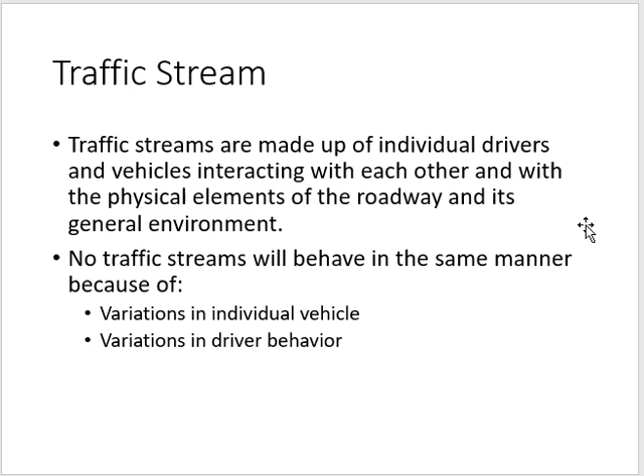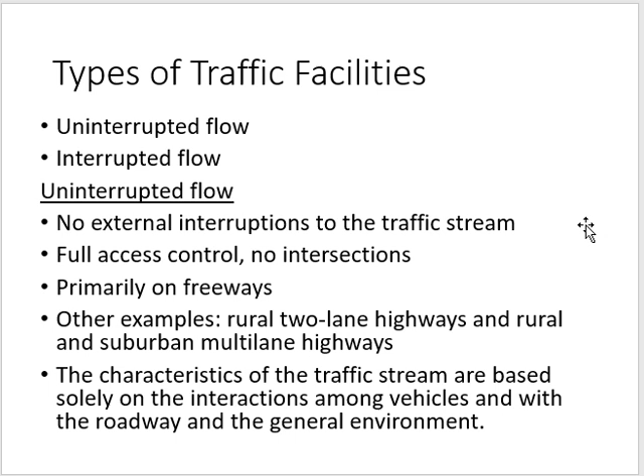Okay, based upon traffic flow, the types of highways based upon traffic flow, there were two: interrupted and uninterrupted. Then we talked about traffic data. Traffic data can also be divided into two types, right? Two types of traffic data, traffic parameters: microscopic and macroscopic. Microscopic is small, one or two vehicles. Macroscopic is a group of vehicles.

Within each category, we will discuss three. Within each category, we will discuss three. We started with macro. Okay. Yeah, not asking.

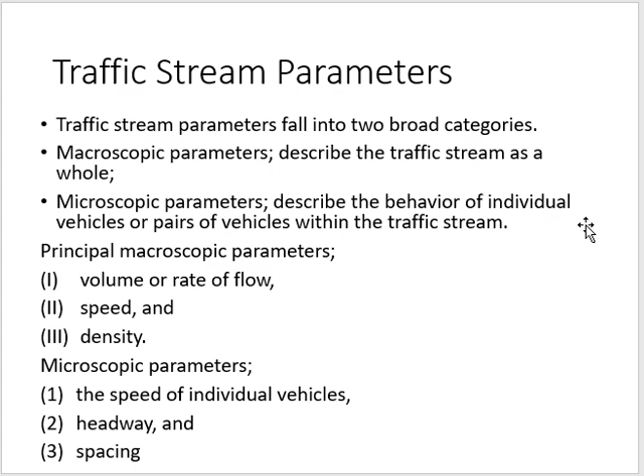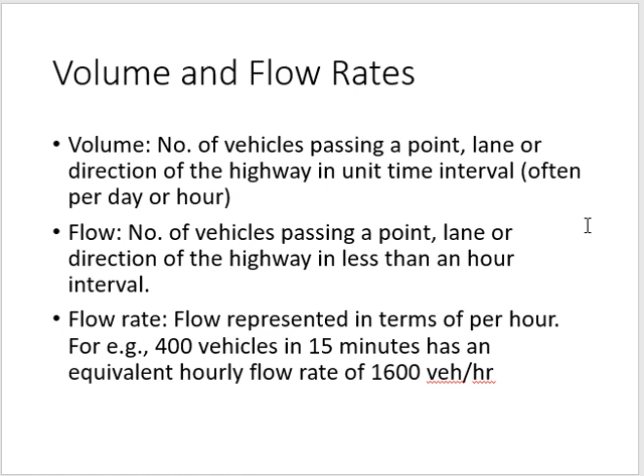We started with volume. And volume can also be called flow or rate of flow. How do we define volume? Number of vehicles per day or per hour. Can it be less than 1 hour? Yes, and then we call it flow. If you take the flow and convert it to 1 hour, it's rate of flow or flow rate. Then we discussed 4 types of daily volumes.

Okay, we discussed 4 types of daily volumes. These were AADT, AAWT, ADT, and AWT. AADT means average of the whole year, all days. AAWT means average of the whole year, only weekdays.

Only weekdays. ADT means average of all days, but which A is missing? Less than 1 year. So the A of annual is missing here, right? It was AADT. I took the annual out. It becomes ADT. And the last one is AWT: average of weekdays and less than 1 year.

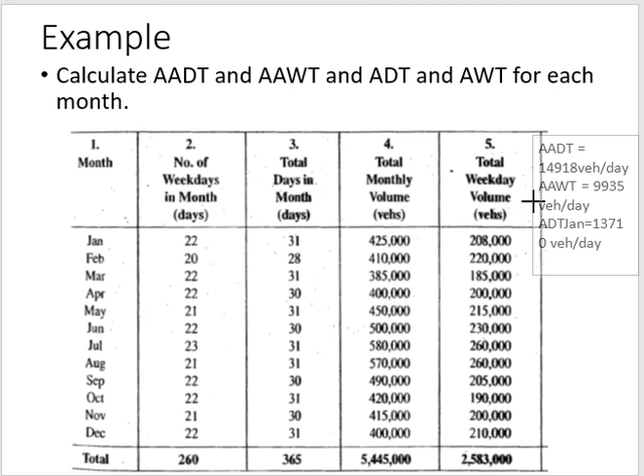Okay. Now, going back to AADT. It's for the whole year, right? And then you calculate AAWT as well. So AADT is higher, AAWT is lower. What does it tell you about this place or about this highway? When you take the overall AADT, it is higher. When you only take weekdays, it becomes lower. That means what? The weekend traffic is higher. On this location, the weekend traffic is higher. So maybe it's a location where people go on weekend. You know about these places. Don't tell me.

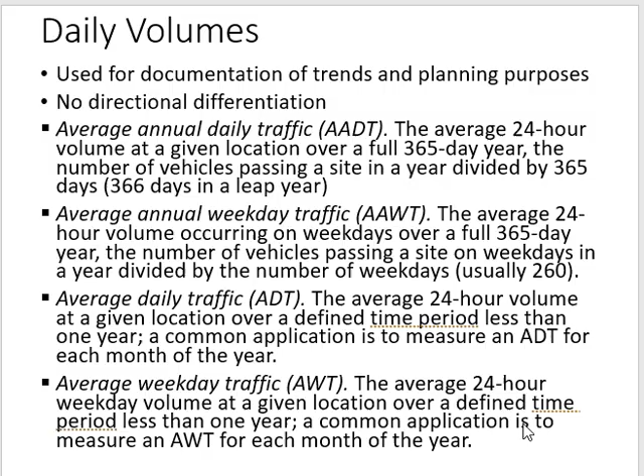Now, yeah, okay. So selection of daily volume depends upon the data which is given to you. In the first example which we did, where we calculated ADT and AADT and AWT and everything, the data was given for the whole year, right? So I can calculate all these four things, ADT, AWT, AADT, AAWT, because the data is enough. If somebody gave me data of 1 month and told me calculate AADT, you cannot, right?

Somebody gave me the total of the whole year only. We used 5445, whatever the total was. Somebody just gave me this value. Now he says calculate ADT of January. I cannot. Okay? Clear or not? No? Huh?

If total traffic of the whole year is given, nothing else, you can divide by 365 and get AADT, right? Can you use the same value to calculate ADT of January? No, because for that you need total traffic of January. So what you are calculating, first of all, depends upon what data is given. Clear?

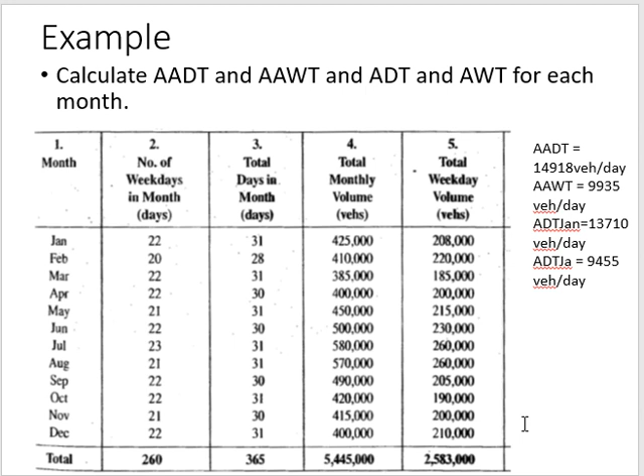So ADT and AWT cannot be for the whole year. And similarly, AADT and AAWT cannot be for less than 1 year. You cannot interchange them. I have to calculate AADT, but the data is 1 month, I will call it AADT? No. You cannot do it. They are asking for ADT, but I have the total of the whole year, I will call it ADT? No. You can call it something else, but not ADT. Okay?

I use daily volume for planning. Then I convert daily volume to hourly volume for design. And even for management of traffic, like changing signal timing, putting a stop sign, changing the speed limit, I will use hourly volume. So why do I need flow, sub-hourly volume? Sub-hourly volume is important because if you don't consider it, this can affect your design. How?

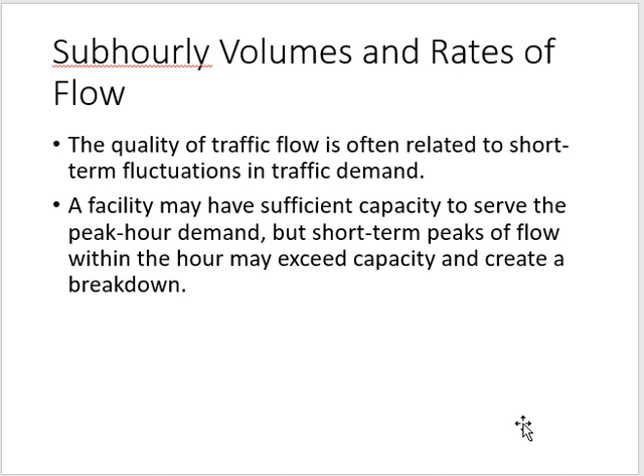In the last example, the maximum DDHV was 6,000 per hour. How many per minute? 100 per minute, right? So if somebody goes to the field and starts counting vehicles every minute, will he count exactly 100 every minute? Some minutes will have more, some will have less. So there's a fluctuation. If you don't consider this fluctuation, it will ruin your design.

How? Go to the next slide. For this we have to look at the example. Without an example you cannot understand this. Somebody takes traffic from 5 to 6 p.m., and they are counting every 15 minutes. The count is given every 15 minutes. At the end, they have given the total as well, 4,200, right?

What do you call this 4,200? Is it volume? Is it flow? Is it rate of flow? Is it daily volume, hourly volume? It will be volume. Which volume? Hourly volume. 4,200 is the total of 1 hour, so we call it hourly volume.

What about these values which are given for 15 minutes? Column 2, 1,000, 1,100. What do we call it? Flow, because they are for 15 minutes. And then you look at the next column. Each value is converted to per hour. So we call it rate of flow. Got it? So in this table you see all three things: hourly volume, flow and rate of flow.

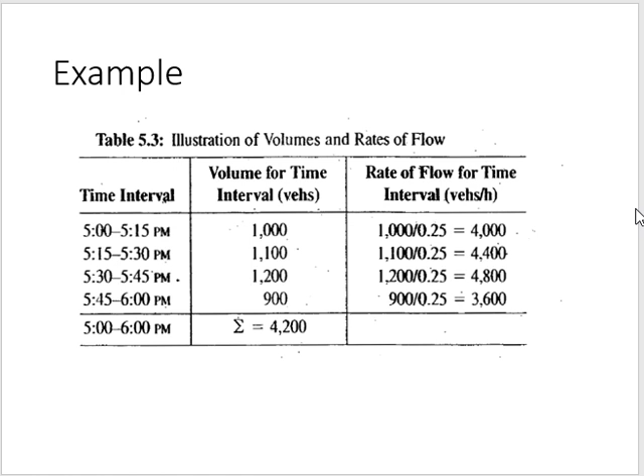Now, if they designed it for 4,200 in 1 hour, how many vehicles can this highway pass in 15 minutes? 4,200 in 1 hour. How many in 15 minutes? 1,050. Okay. So if the design volume was 4,200 per hour, then it means it is 1,050 per 15 minutes. Got it? Clear? Any question? Okay, which is what is written on the next slide. Go to the next slide.

You? There's problem. Yeah, I know.